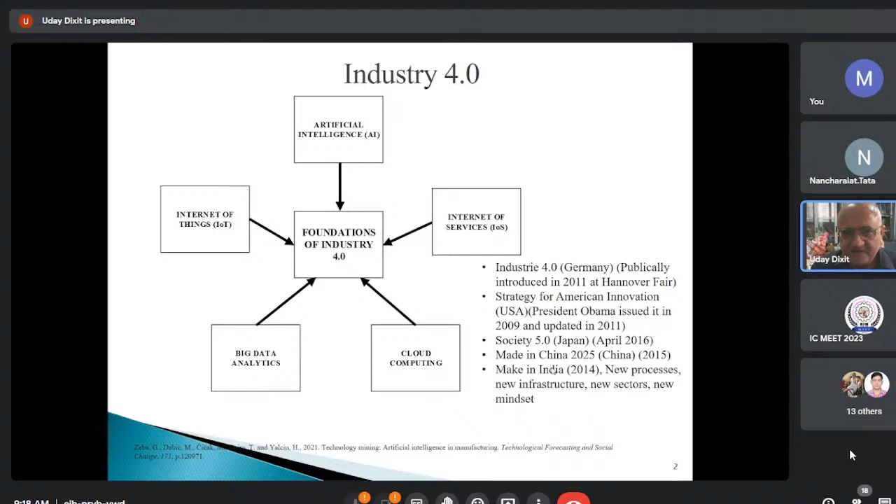So this is what, he also now took initiative about Digital India, for which digital manufacturing also is naturally a part. Digital manufacturing is a process that uses computer systems to create, simulate, and optimize manufacturing processes. We can simulate the processes.

Then 3D printing is also part of digital manufacturing, because we are basically printing everything by computer. Just like we take a printout, we are now taking the printout of the actual object. Then computer aided design, of course, very important, simulation software.

By using digital models of products, manufacturers can test designs and simulate production processes to identify and address potential issues before physical production begins.

Digital manufacturing also enables customization and personalization of products, as digital designs can be easily modified to meet specific customer requirements. So we can have now mass customization. We can make the specific product for each and everybody.

I was just thinking, suppose you go to a cloth shop and you want to purchase some t-shirt. Generally the shop has about maybe 10-15 varieties of t-shirts, maybe 20 varieties, but the population is huge, so the t-shirts will become common.

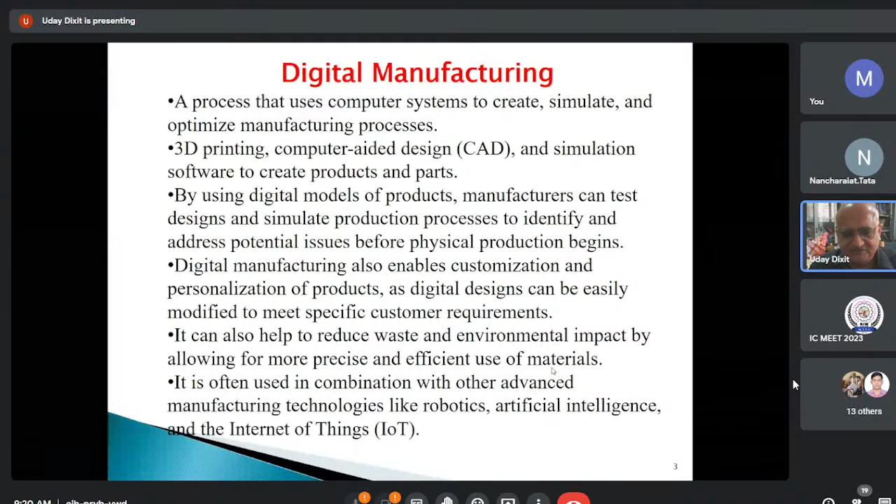Digital manufacturing can also help reduce waste and environmental impact by allowing for more precise and efficient use of materials. It is often used in combination with other advanced manufacturing technologies like robotics, artificial intelligence, and the Internet of Things. Nowadays, we are also talking about digital twin.

This is a new type of topic, although basically research in that direction has been going on for decades. But now in a big way, digital twin research is coming up. It has become a buzzword. Digital twin is a virtual replica of a physical model or process.

It is mainly used for controlling, monitoring, and evaluating the performance of the physical model or process under consideration, and real-time monitoring of manufacturing processes using digital twin enables manufacturers to improve efficiency and throughput. The ease of availability of data captured from sensors has made it much easier to create digital twins.

Now, if you want to make a real digital twin, naturally you have to do modeling and simulation of the process beforehand. Then only you can make a digital twin.

This was mostly first used by NASA. This is the actual rocket which is going in space, and in the virtual space the same thing is happening, so it is like a digital twin. Whatever is happening in space, the same thing you are seeing on your computer screen.

If anything is going wrong there, you are trying to correct from here itself, and you are controlling, because obviously you cannot go into space, you are controlling from the ground. So it was highly needed for NASA to work on the digital twin.

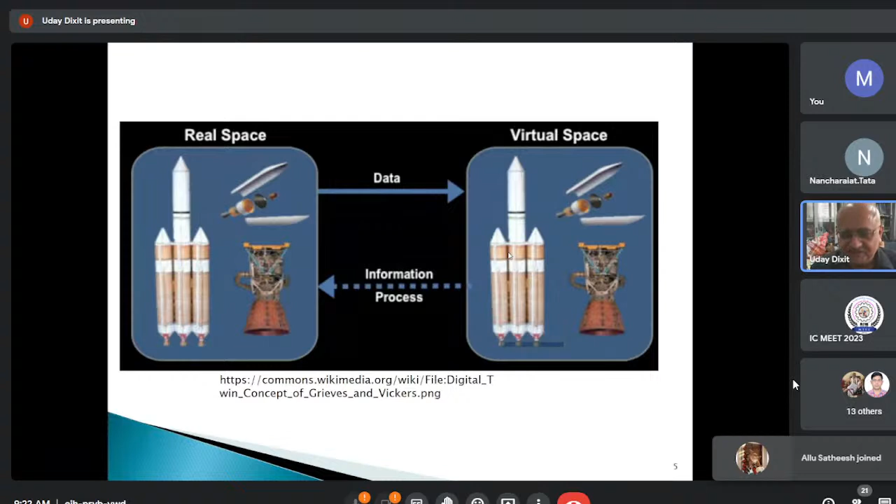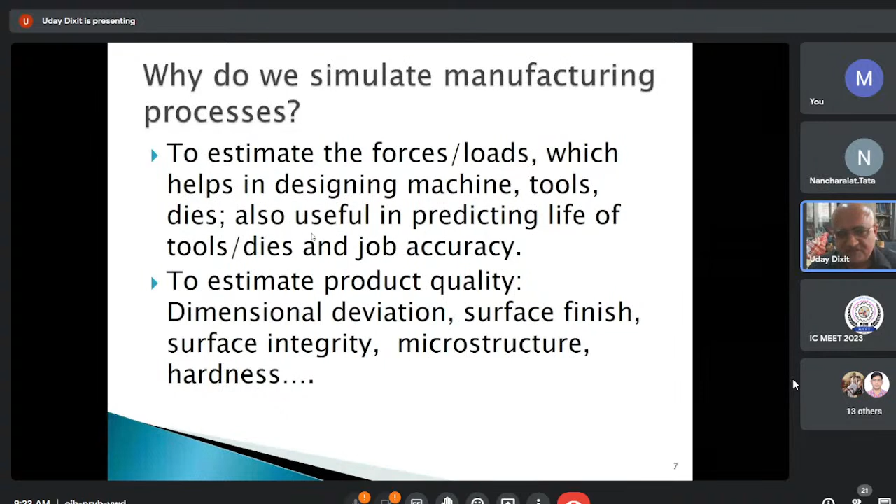To be specific, manufacturing processes are simulated for estimating the forces and loads, which helps in designing machine tools and dies, and also in predicting the life of tools, dies, and job accuracy. We also want to estimate product quality, dimensional deviation, surface finish, surface integrity, microstructure, and hardness. Some of these techniques are now well established, but some are still difficult even now.

Let me explain the difference between modeling and simulation, since we often use these words interchangeably, even though the topic of this talk is modeling and simulation of manufacturing processes. Basically, a model is the representation of a process that provides some information about it. It may not be the actual process, but something representing it, giving partial or full information. It can be a physical model or a computational model. A model gives information about the process, and execution of a model is called simulation in computer terms.

Suppose I make a model, meaning I put in a lot of equations and mathematics, write the computer program, and finally execute it by giving different input values. I will show you results, and those will be called simulation.

Two types of models are used: the direct model and the inverse model. Both are important. A direct model means you give me input parameters and I tell you the output. In the inverse model, you give me the output that you are getting, and it tells you what the input must have been.

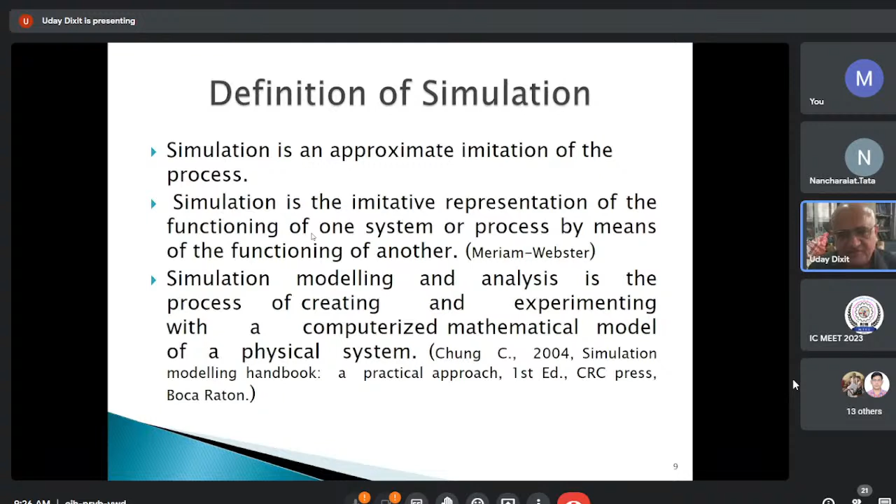Simulation, modeling, and analysis is the process of creating and experimenting with a computerized mathematical model of a physical system. That is what we call simulation and modeling.

Now let us be specific about manufacturing processes, particularly in the context of mechanical engineering. One is machining, a subtractive manufacturing process where we remove material to make a shape. Then metal forming, which can be called mass-conserving, where we just change the shape of the metal. If I have a rod, I can bend it and that becomes a mass-conserving process. Casting is also mass-conserving. Metal forming and casting are similar in that you take the same amount of material without wasting much and make the shape.

The only difference is that in casting there occurs a phase change from liquid to solid, while in metal forming the solid remains solid, though it flows like a liquid. In casting you make it in liquid form and then it solidifies. Then there's powder metallurgy, where material in the form of powder is used to produce shapes; it is similar to casting, except here the powder has to be compacted and sintered to get the final process.

Then joining, meaning welding and adhesive bonding, where you join two materials. And 3D printing, now called the additive process, which is something like the opposite of machining—instead of subtraction, you are doing addition.

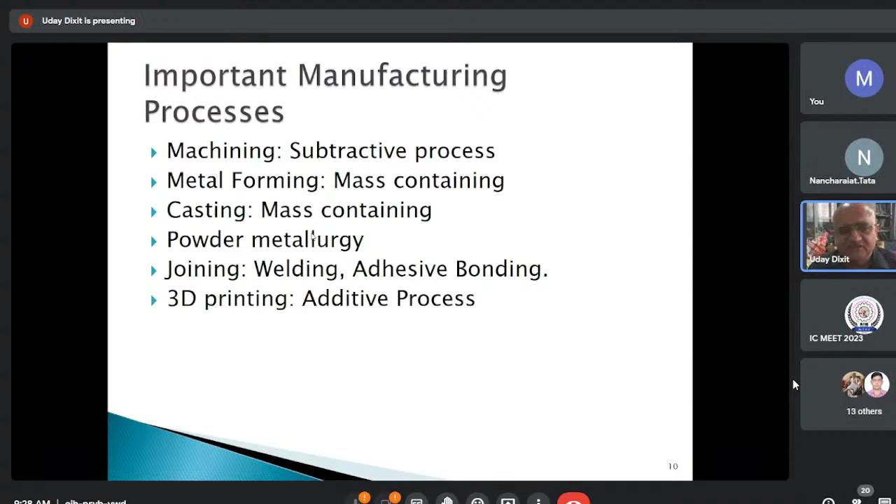It gives very good surface finish, but has a drawback also, it's not very sustainable. Its electrolyte is not good for the environment. I heard that in some countries it is banned, but in our country, of course, we are using it. So we have to be careful about the wide use of that, and particularly we need to develop a sustainable electrolyte rather than one which will harm the environment.

And then typically this is machining. Now coming to the metal forming processes, these are the processes that cause changes in the shape of solid metal parts via plastic deformation. We have bulk metal forming and sheet metal forming, two types of things.

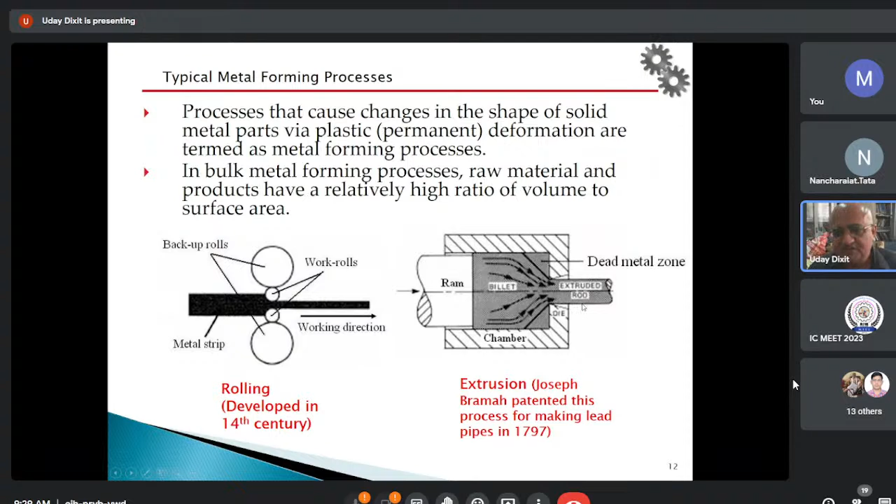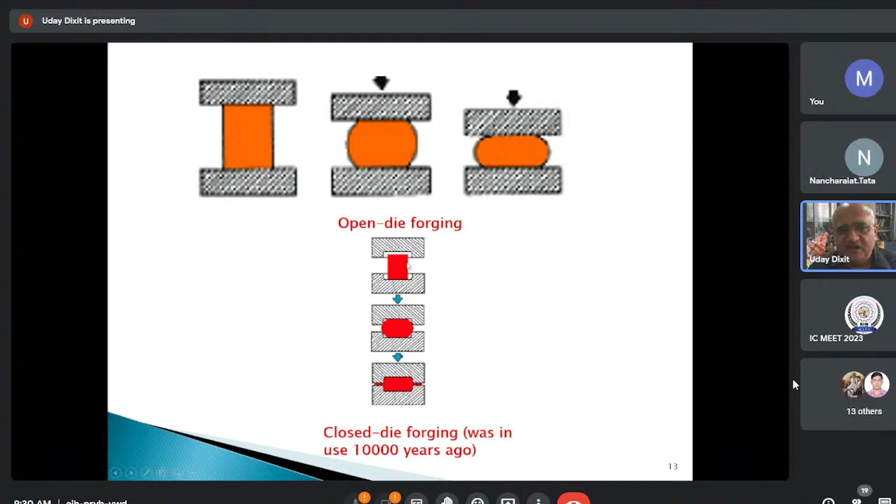An example is the rolling process, and here you have extrusion also, which is a bulk metal forming - you are pushing it. You can have forging, this is open die forging, and this is closed die forging. You know that the connecting rod of an automobile is made by a closed die forging process. And then wire drawing, you can make very thin wires.

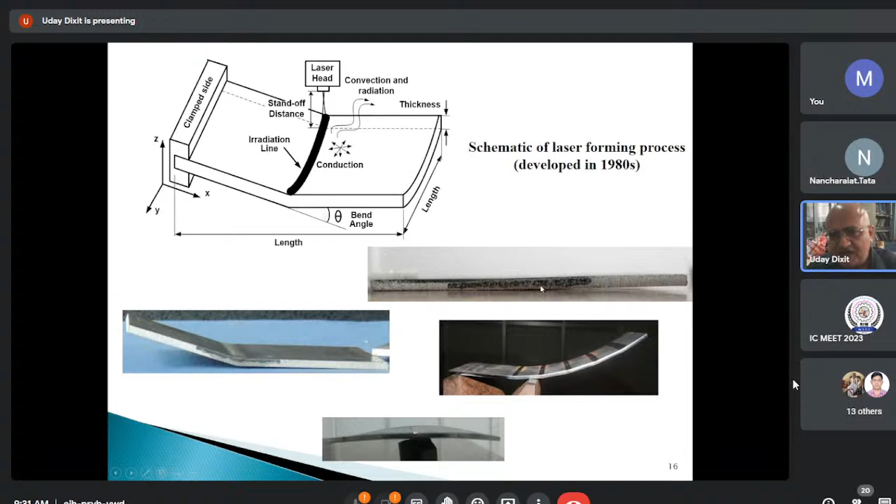Not only machining - in machining, laser was employed since many decades - but nowadays people are even deforming the material by heating, by thermal effect only. So we see here in our lab we have deformed the material. This is a very thick one also, but it has been deformed in a better way than mechanical deformation. We have made this circular arch type of thing, cup type of things, and even very difficult material which are not so ductile can also be deformed because they have been heated.

This is laser - that was only laser bending, but this is laser assisted bending. That means I am putting mechanical load also, but making use of the laser to soften the material. We make it soft, and that's why it bends very easily. So heating is done to change the material property, and load is applied in a mechanical way.

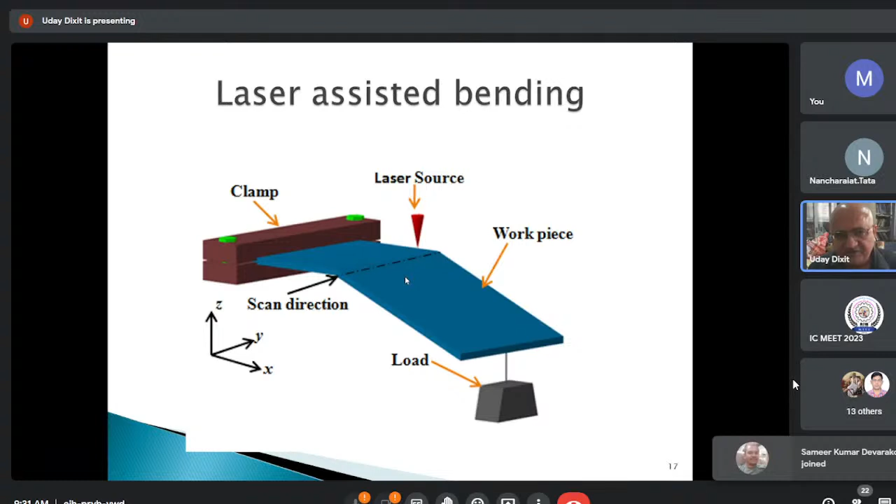And then there is a Japanese term, origami. Origami means making toys using paper - we make many things by paper. Similarly, a sheet can also be deformed by laser heating, and that type of thing is also done. There are now industries which are using laser origami.

Now these were the metal forming processes to make a new product, but metal forming processes can also be used for improving the properties of the material. Among them we have severe plastic deformation processes like equal channel angular extrusion, where you extrude it and it makes a 90-degree bend, then you go back, and you do that again and again. The shape doesn't change, but the microstructure improves and you get high strength.

Similarly, you see this small disc, and your material - one die is rotating and also applying pressure. So combined pressure and torsion also puts a lot of strain hardening, and you get better quality material. Similarly, you can have accumulative roll bonding, where we roll the material, its length becomes bigger, then you cut it into pieces, stack it together, and repeat that process. The purpose here was to get good properties of the material.

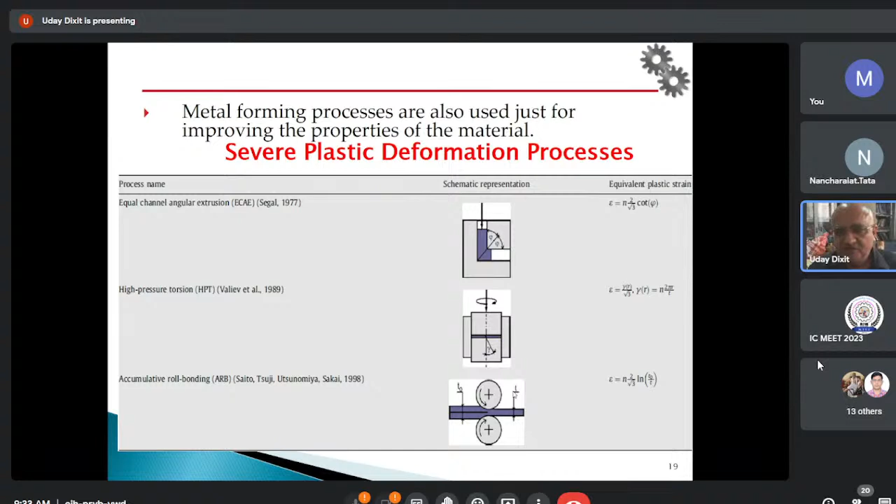The green zone is elastic only, and if you remove the load, the plastic zone will not come back, but the elastic zone tries to come back. So in a way it puts pressure on the plastic zone, generating residual stresses. These compressive residual stresses help us a lot because they nullify the effect of stresses due to loading.

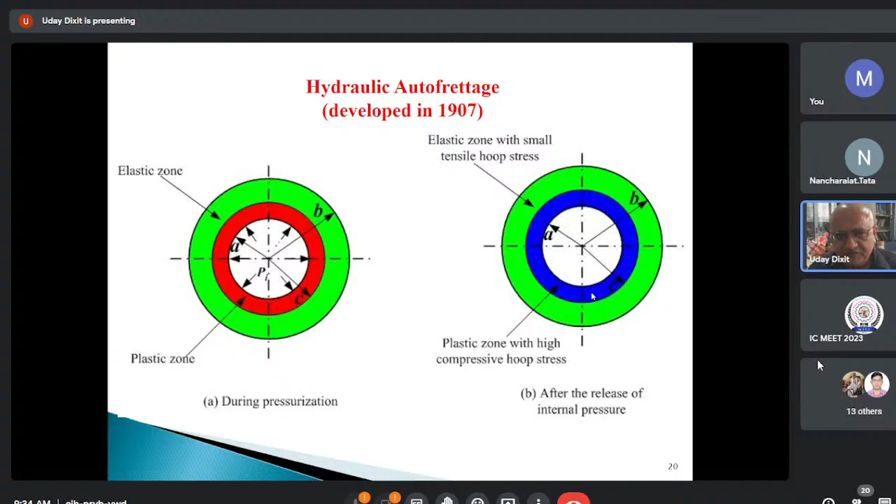So here at IIT Guwahati, we developed the thermal autofrettage process, and this is the same type of thing which is done by hydraulic pressure in the previous slide, but done by thermal means. We just create a differential temperature and it creates ultimately the residual stresses.

Similarly, we have the rotational autofrettage process. This means that if it is rotating at high speed, you get centrifugal stresses, and these can even cause plastic deformation. Once you remove the load, there are compressive residual stresses.

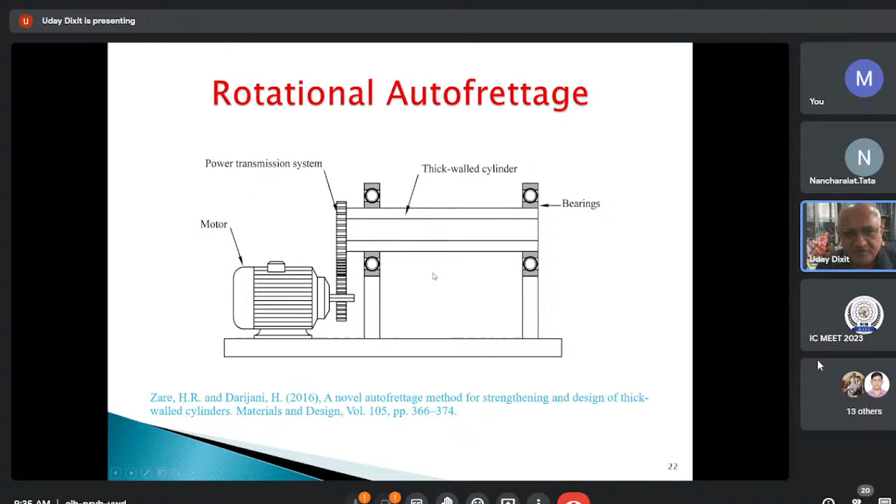In fact, this process has been conceptually developed, but so far not even a single experimental paper has been published on this process. In 2016, the first paper was by Zare and Darijani. So there is a lot of scope to do experiments on rotational autofrettage also.

So, having given this brief exposure about various processes, let me now tell you what are the objectives of modeling and simulation of manufacturing processes.

These are the objectives. One is the power requirement - we want to know how much power the process will take, pressure in the die and tools, stresses, strains and strain rate distributions in the material during processing, and residual stresses in the product.

Residual stresses are very important. They remain in the material, like silent stresses. You will have compressive and tensile stresses simultaneously. On the surface, compressive stresses are better, but tensile stresses are bad. Not many people pay attention to residual stresses because modeling is difficult, and experimental determination is also difficult.

You need some techniques, but this is worth paying attention to because residual stresses occur in machining as well as other processes, and even in 3D printing. They have a major impact on the life of the product.

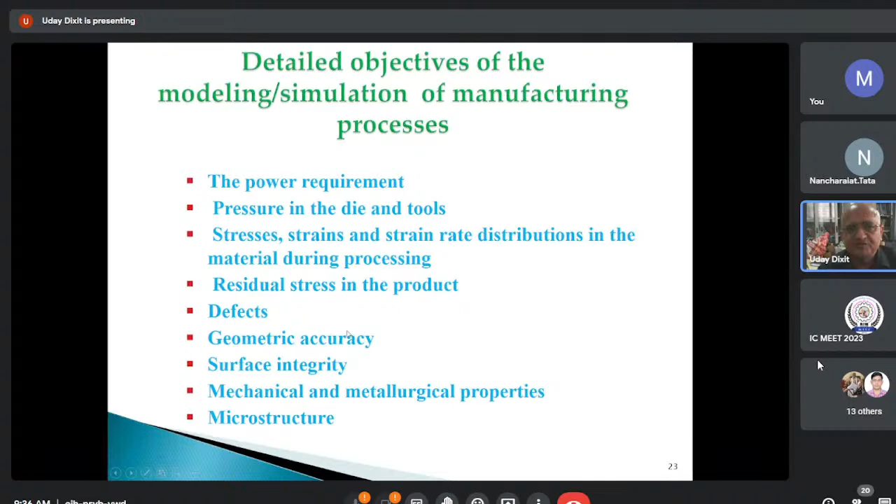Then there are many types of defects - geometrical accuracy, surface integrity, mechanical and metallurgical properties, and microstructures - that can be predicted by proper modeling and simulation.

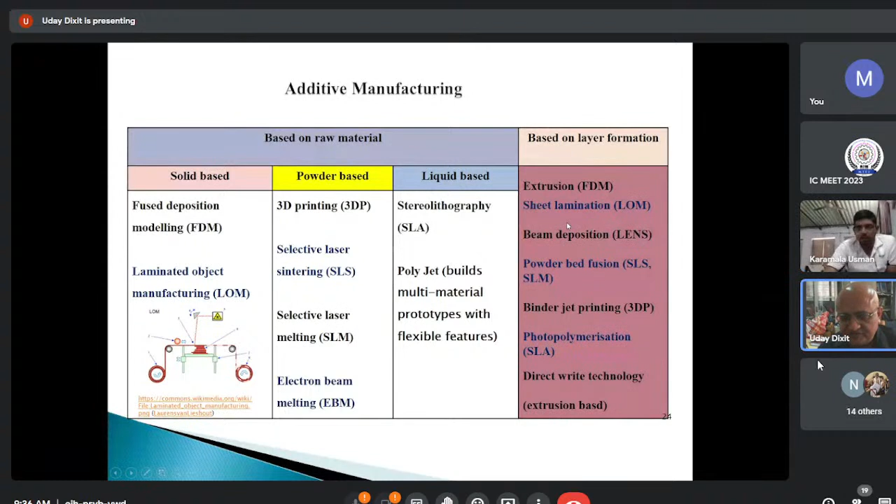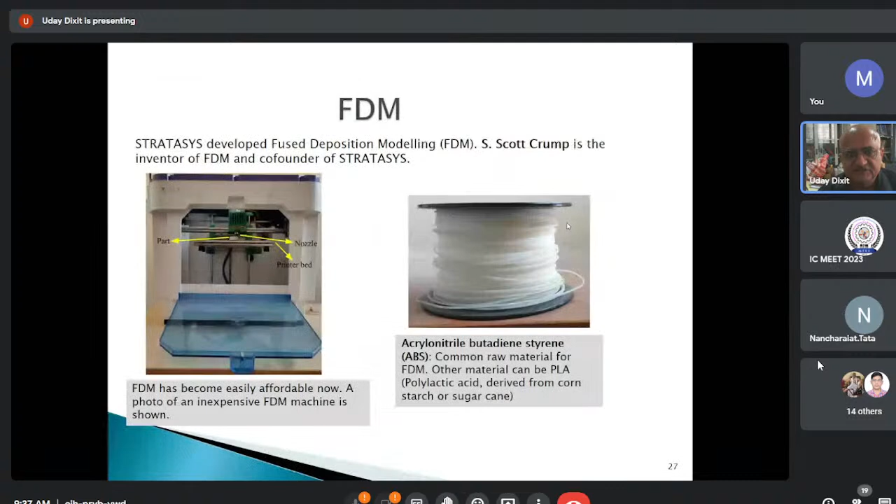Before that, in additive manufacturing we have various processes - solid-based, powder-based, liquid-based - but I think you are familiar with that. Every process has some special features; I'm just passing through this. We have FDM, inkjet 3D printer, selective laser sintering where you sinter the powder material. All these processes have become very important, but modeling in this area is still needed, and modeling efforts, though present, are limited.

Let me briefly tell you that nowadays when we do modeling, we use new techniques - either finite element based, or soft computing based. But I want to give a brief summary of modeling efforts; some of these techniques are still useful and should not be thrown away. Although their importance has diminished, they will be very helpful before you make the actual model in a computer. These analytical methods are also important.

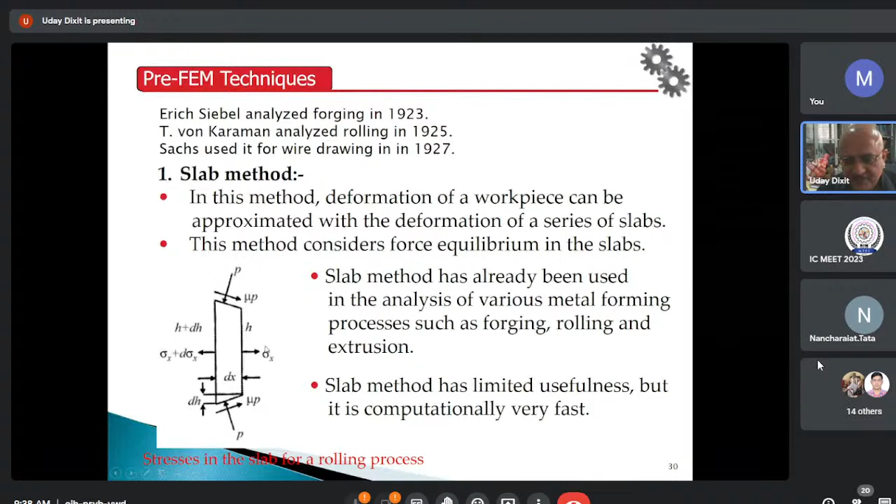One such method is the SLAB method, which is taught in undergraduate classes too, where you make a slab and then form a differential equation of the process. By this you can find out the forces in rolling, wire drawing, or any type of process.

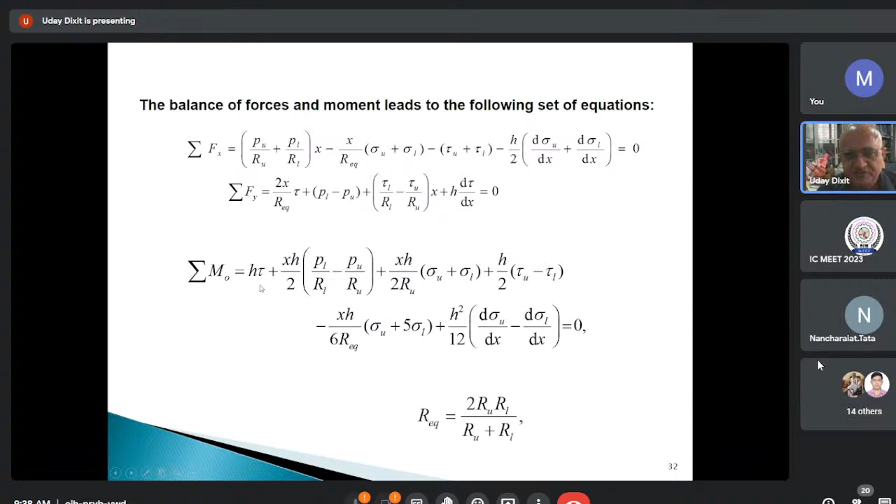In 2000, we published a paper about producing curvature in a sheet using the slab method, actually asymmetric rolling. Suppose the speeds are different, then it takes curvature, and you have to write many equations based on taking a slab, force balance in x and y directions, and moment. These then have to be solved by numerical methods - a computer will still be needed because you cannot solve that by hand.

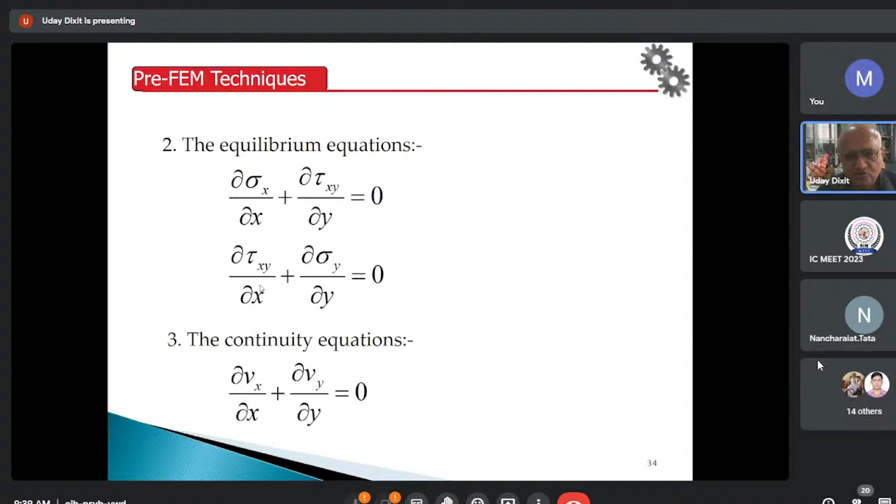Then there is the slip line method, which is also based on equations, but it is only for plane strain type problems.

So, limited importance. Here we assume that the material flows along the slip lines, along some 45-degree lines to principal stress, and based on that concept we have mathematical equations.

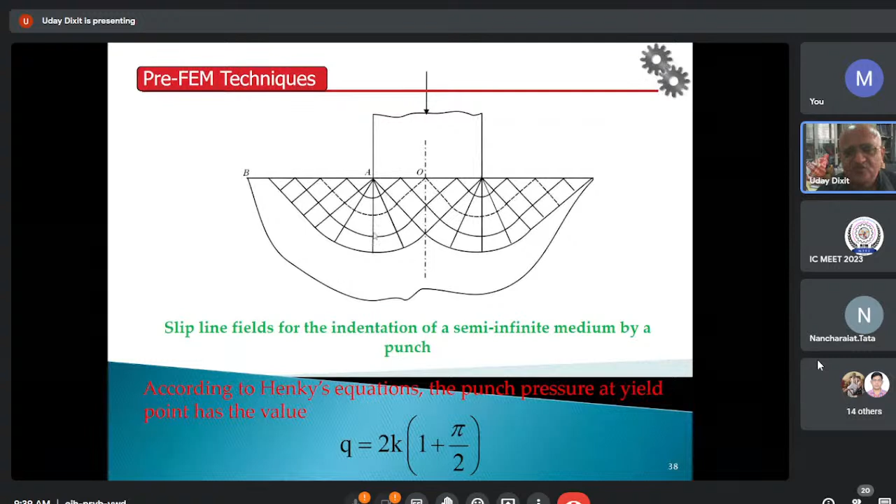Then you can find out indentation of a semi-infinite medium by a punch. You can find out by slip line method how much load will be there. Even in machining, you can use slip line method.

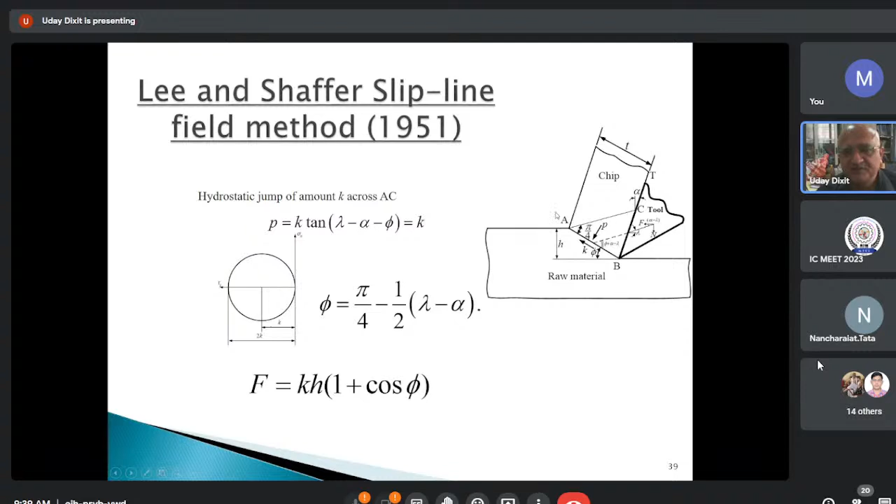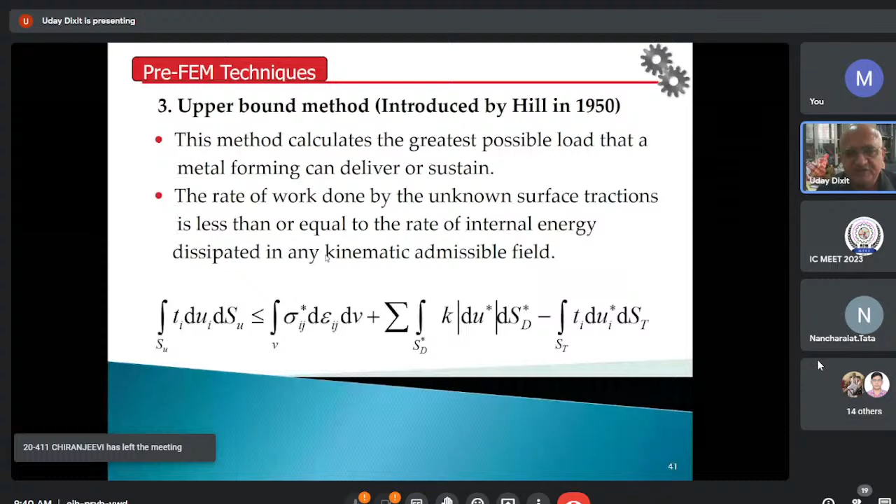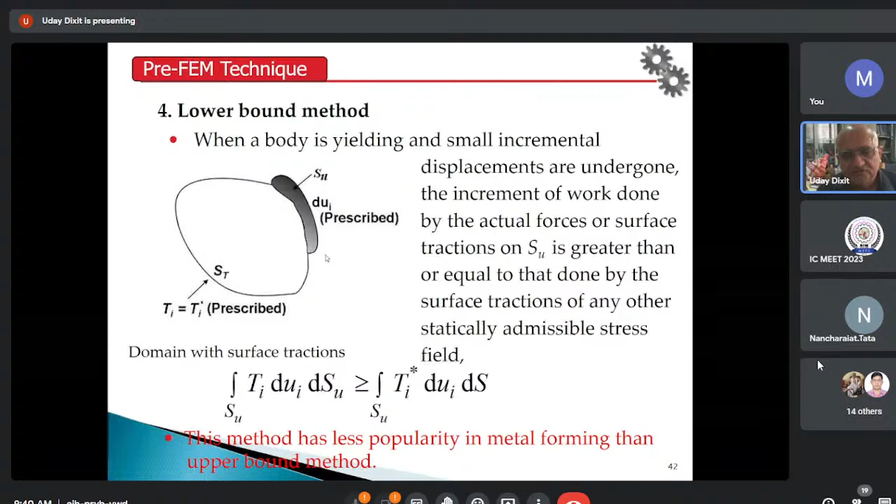Then upper bound method, it was introduced by Hill in 1950, and it can give you an estimate that it is an upper bound. That means power can be this much, maximum power can be this much. And lower bound method is just the counterpart which tells about the lower bound.

And visioplasticity method, of course this is almost nil nowadays, but it was a semi-analytical method. First you make a grid pattern in your material, then deform it in process, and then you analyze how much deformed grid looks, and based on that you do analysis.

But nowadays you know that basically FEM has come starting from 1970s. So here you have to solve the equation. If you want to tell what is FEM in half a sentence, then you say that FEM is a method of solving differential equations. Finite element method is a method of solving differential equations.

That means you should have a differential equation, then only you can apply FEM. Otherwise you cannot do it, so that one has to understand. So what differential equation do we use? We use continuity equation, we use equilibrium equations of the material, that means basically Newton's law.

Understanding this thing has become more important because nowadays you have ready-made packages which will solve your problem, but you do not know which differential equation is ultimately getting solved. Many students are not able to answer that question. So therefore you have to pay attention that actually I am solving this differential equation.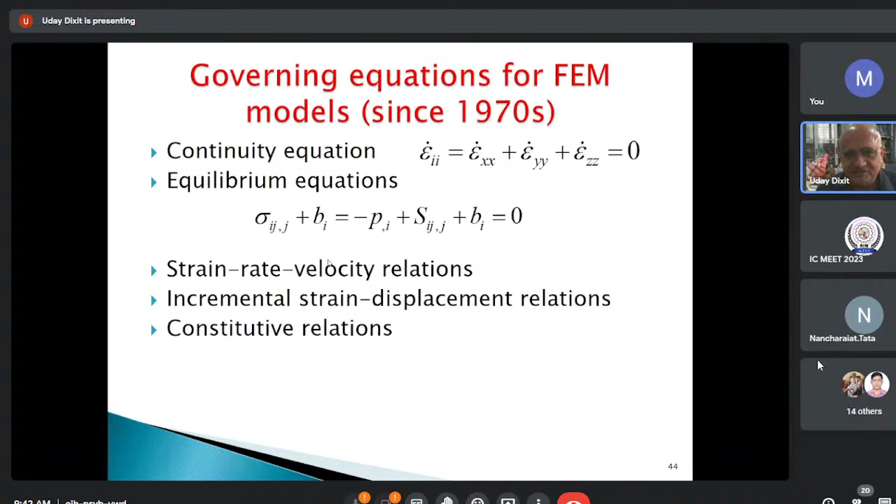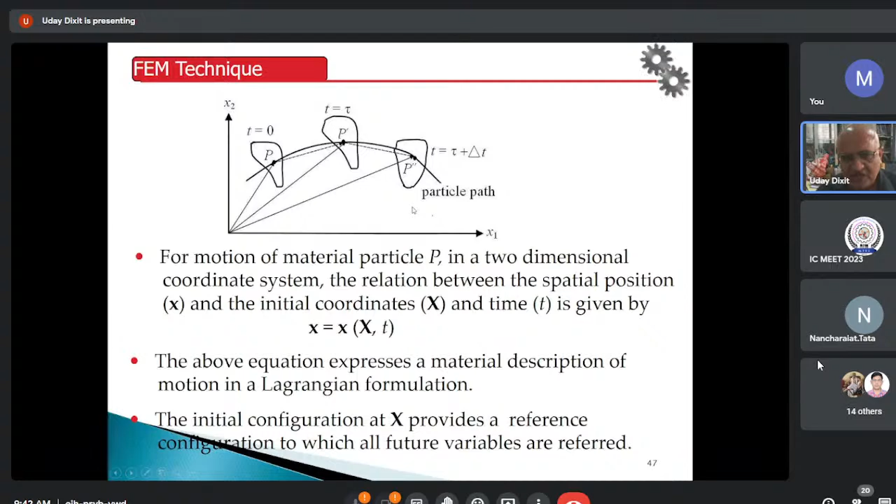Luckily I don't have to write the code because the code has already been written in the package. And there are some techniques: one is Lagrangian formulation, which is a control mass approach, and then Eulerian formulation. That means in one we follow the particle, so particle path is followed, and in the other we stand at one place and see how many things are going.

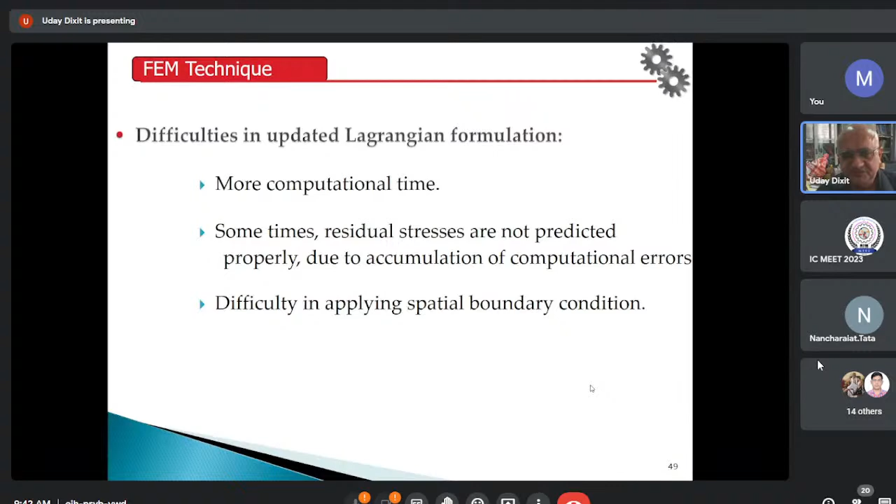Like I am standing here, I am seeing one car has passed, one truck has passed, and after that something else will pass. So these are the things. Our Lagrangian processes will have difficulty because of more computational time, and in fact residual stresses are not predicted properly, and some boundary condition application may also be tough.

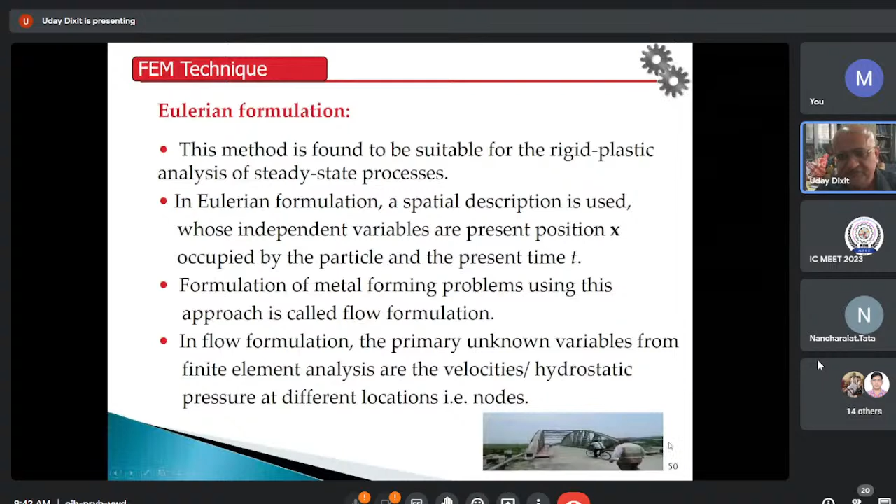In Eulerian, of course, as I said, you stand at one place, say on the bridge, and see how many things are passing. So you make a control volume and similar things. But there will be equations in this also, like the Levy-Mises plastic flow rule. You have to understand the equations, and then strain hardening behavior, continuity equations.

So there are many techniques of doing that. Luckily now the packages are there, like penalty method, mixed pressure velocity formulation. And how do we solve the simultaneous equations? It is not that you can solve only by Gauss elimination, you have to use other methods, like one such method is the Householder method, which can solve these type of things.

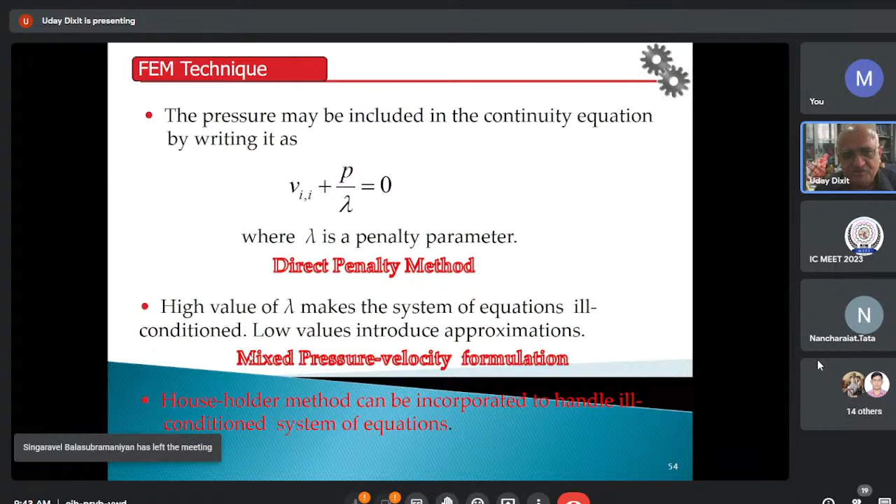So in the coming days, because the packages have become very efficient, you will not get much opportunity to develop codes for that, since commercially they have already been added. But it is a request to all the young engineers that they should try time to time, they should read these papers in which detailed description is there, so that they can know what is going on inside the package.

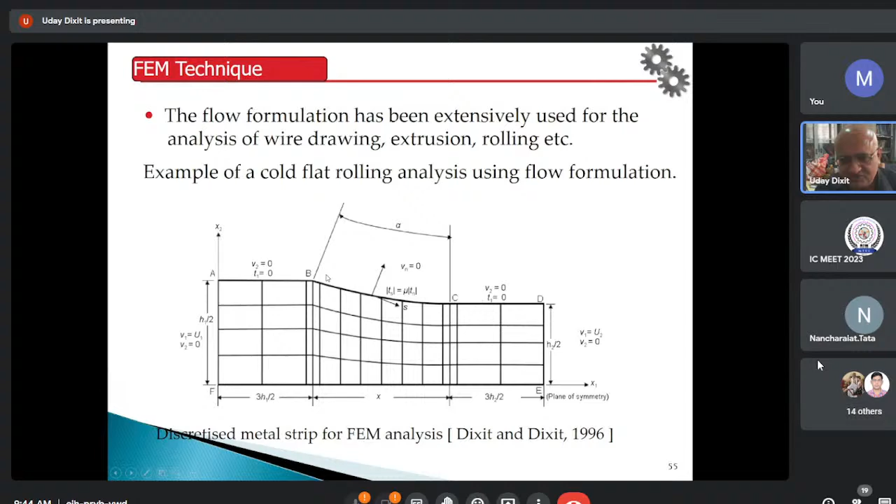So this is from my PhD, long back, when I made a FEM model. This shows the boundary condition, I wrote the package, and after that there were some difficulties, like some spurious pressure term was coming. Later on, after 10 or 12 years, my student published a paper and modified my own analysis. He combined finite element and finite difference together, and also used neural network, with computations, not experimental data, but computations only.

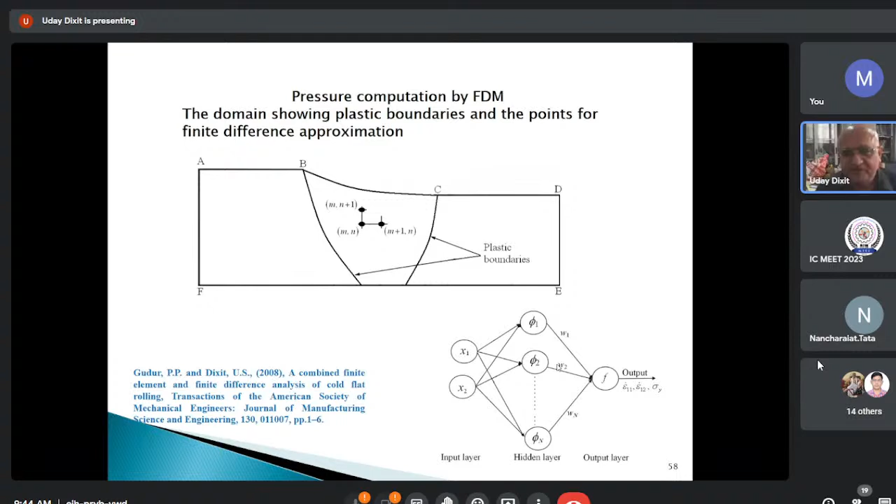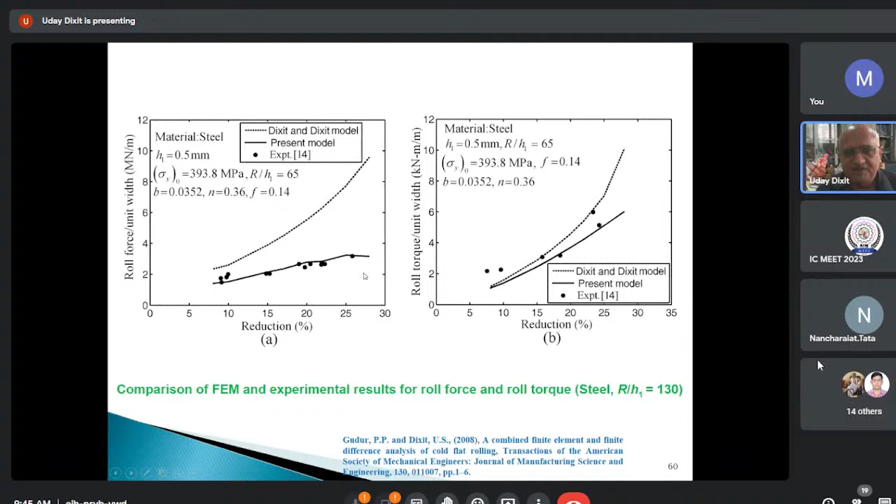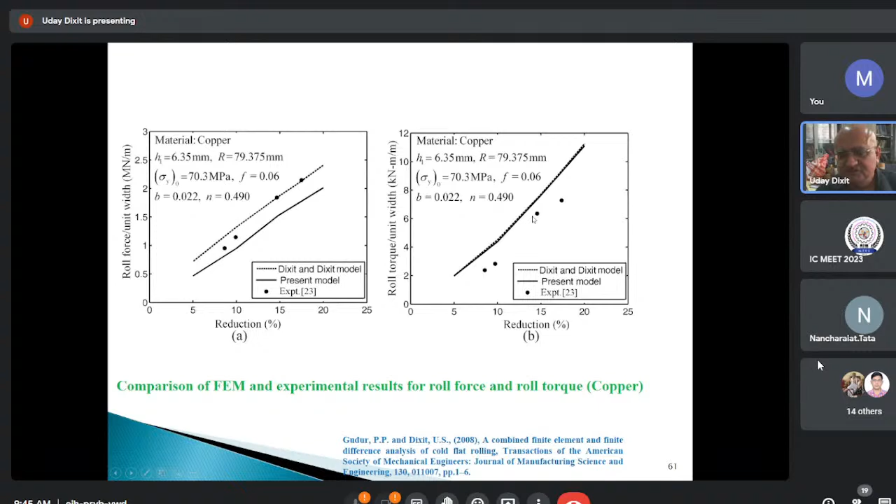Similarly, for other materials also, you see my model was giving huge error, but after modification, my student's model gave very good results. Similarly, for other material also, both the models, and this is experimental, both models are giving this result.

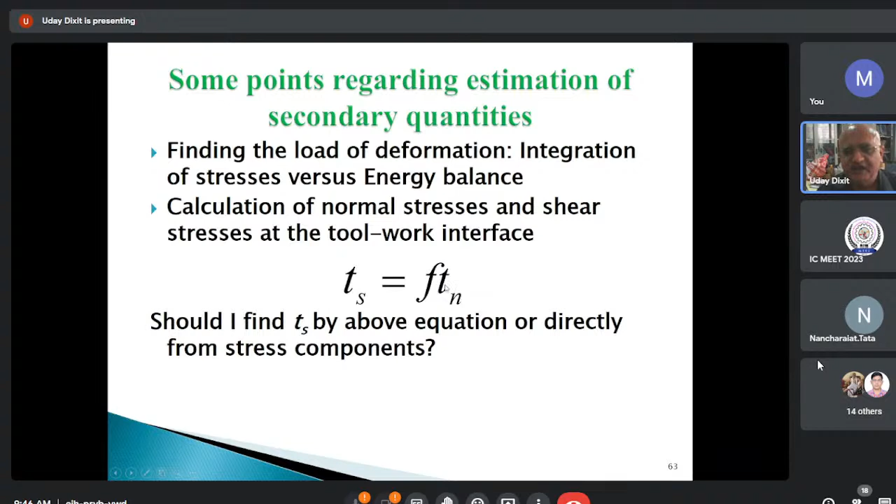Now there are some points that when you do any numerical things, small things matter a lot in numerical accuracy. For example, there is a formula Ts equals F times Tn, where F is the friction coefficient and Tn is the normal stress. Now the question is, in FEM, should you find Ts by equation, or directly from stress components?

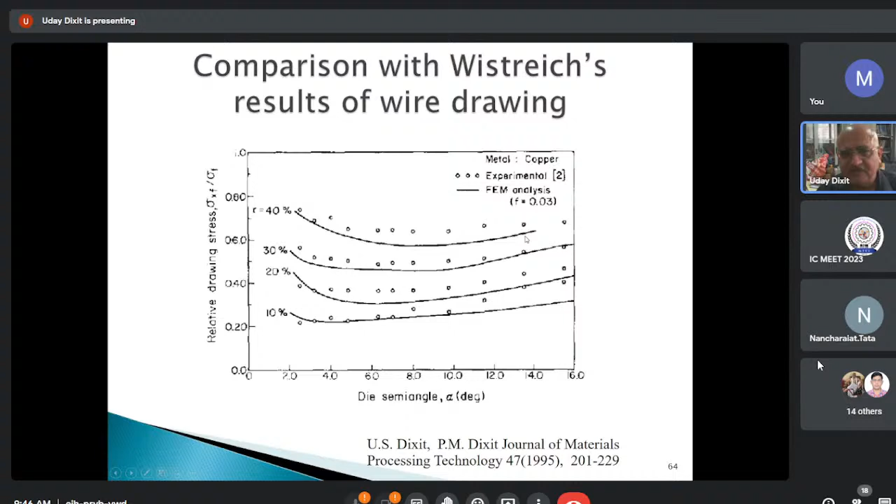Sometimes if you use this formula, you may get better results. This is my result for wire drawing, which I did long back, and you see the results are matching with the experimental results. Numerical aspects are in fact very important, because sometimes if you make a numerical mistake, the results can be very funny.

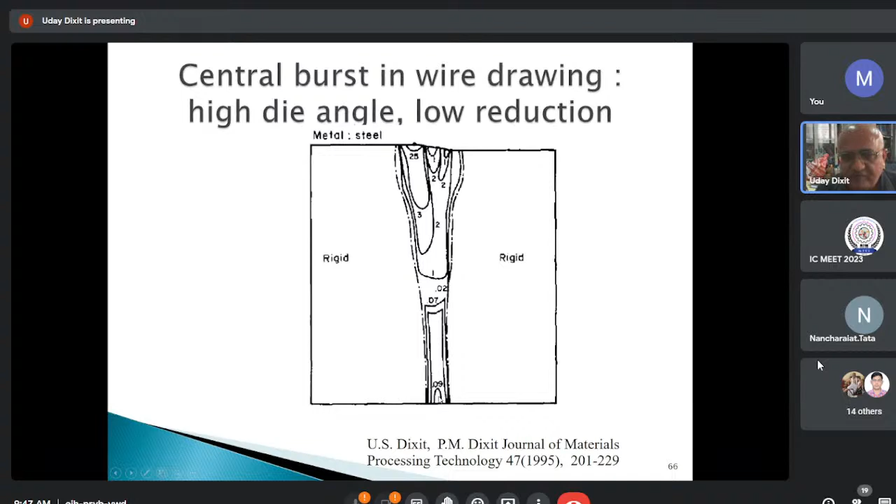If you do proper simulation, you can find out even the characteristics of the material very nicely, and some defects also. For example, in a particular situation, the plastic zone has become very narrow, so chances of bursting or cracking is there. That type of thing also you can know.

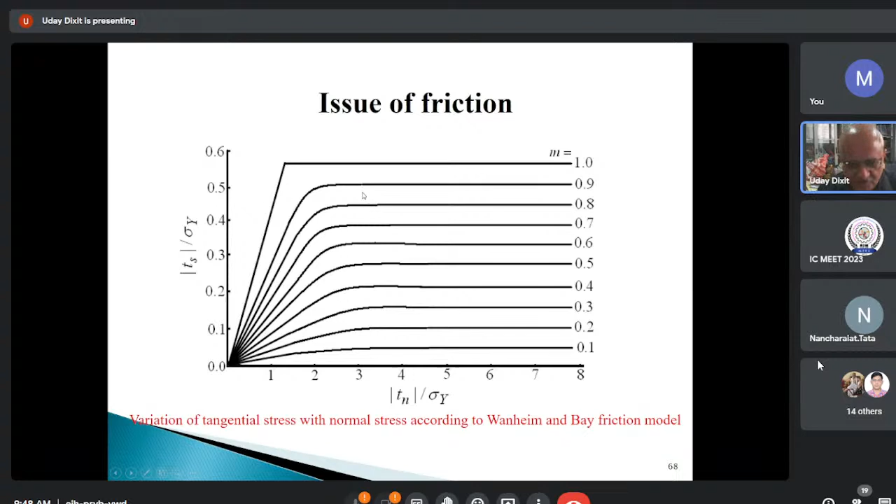Similarly, we know similar behavior in rolling. In all these processes, friction modeling is also very important. We have usually been told about Coulomb's friction model, but Coulomb's model doesn't work well. It works at low normal stress, but after that it becomes more or less saturated, meaning friction force doesn't increase with load. This is the Wanheim and Bay model, which shows how the transition takes place from Coulomb's model to this model.

These things are very important, and friction varies with temperature and amount of plastic deformation also. If somebody wants to do research in friction in manufacturing, lot of scope is there, but I must warn that the area is very challenging, very difficult to get a breakthrough. Lot of conflicting reports you find in the literature.

So coefficient of friction, we did this, and you see, because friction depends on so many things, it is very difficult to predict. There may be chemical aspects, lubrication, surface oxide film, tooling aspects, what type of tool, material aspects, thermal aspects, mechanical aspects - many things are there.

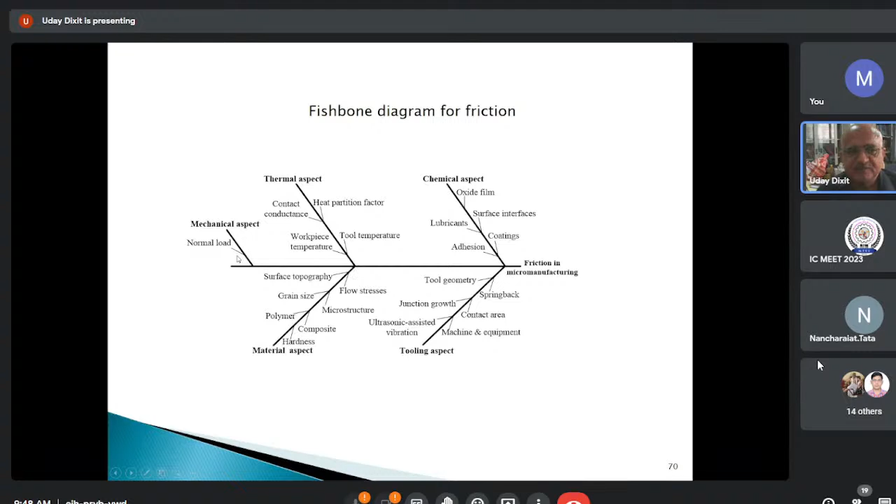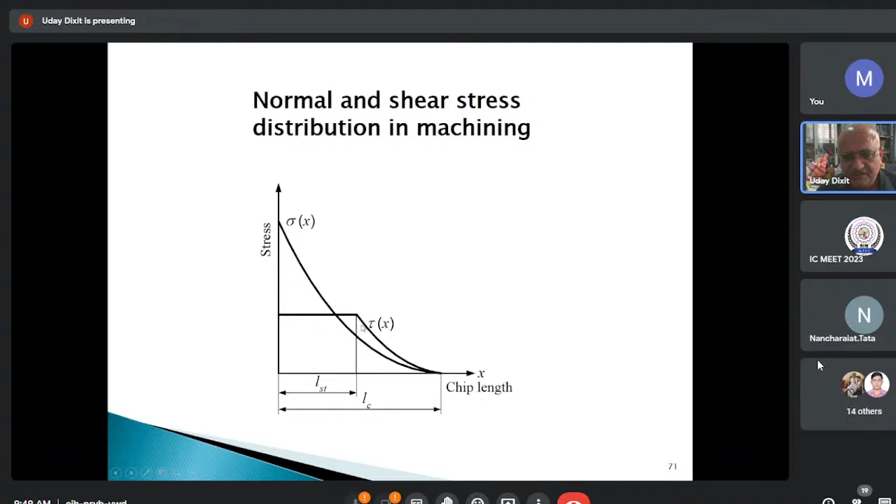In machining, the normal stress varies like this, and the friction stress varies like this. In the beginning there is sticking type of friction, and then there is sliding. Another phenomenon is anisotropy, which can also be modeled by FEM, and then thermal modeling. Heat transfer and thermodynamics can also be applied in manufacturing. In fact nowadays, if you want to model 3D printing or anything, you have to do thermal modeling also.

A manufacturing engineer's job is very difficult when doing modeling, because he cannot say heat transfer is not his subject. So here I am modeling the rolling process, and I'll show the way we are modeling that, involving both deformation and thermal models, along with a lot of material models.

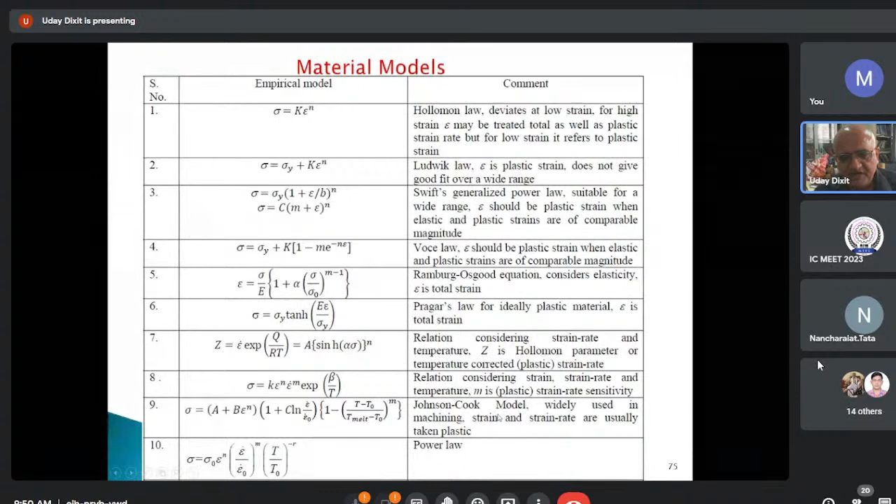We usually easily apply sigma equals K epsilon in Hollomon's law, but that's not the only thing. The stress may be dependent on strain rate and temperature. This is Johnson-Cook's model, and there are many other such models used nowadays.

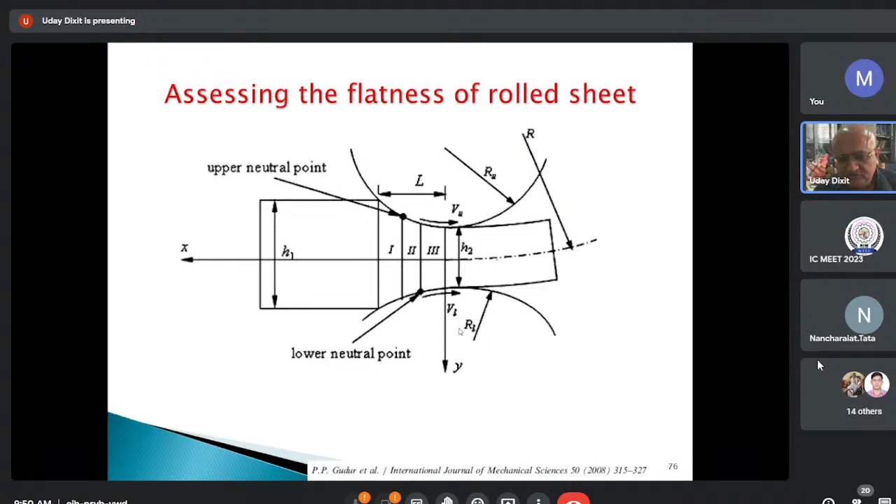Then you can assess the flatness of the sheet, etc. It is not only about the forces, but you can also find curvature modeling of foil rolling. This becomes even more difficult because a lot of elastic deformation takes place.

So how the foil will be modeled - we try to do inverse modeling at our IIT Guwahati. This rolling mill was developed by one MTech student, around 2000-2001, as you can see from the nameplate. It was an MTech project, and in that he made the complete rolling mill.

In fact, he wrote to one company to purchase two rolls. They said that such a small quantity they couldn't supply, but since he was doing it for his MTech project, they sent it free of cost - he only had to pay the postal charges. Finally it came and we fabricated it.

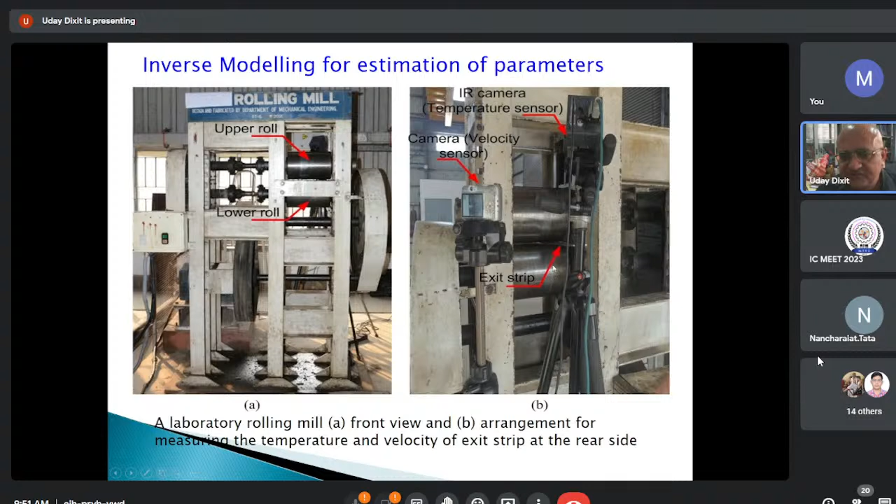So we keep doing small experiments here - putting a camera to assess velocity, and an IR camera for measuring temperature. By measuring slip and temperature, we predict what the property will be. So it's an inverse way.

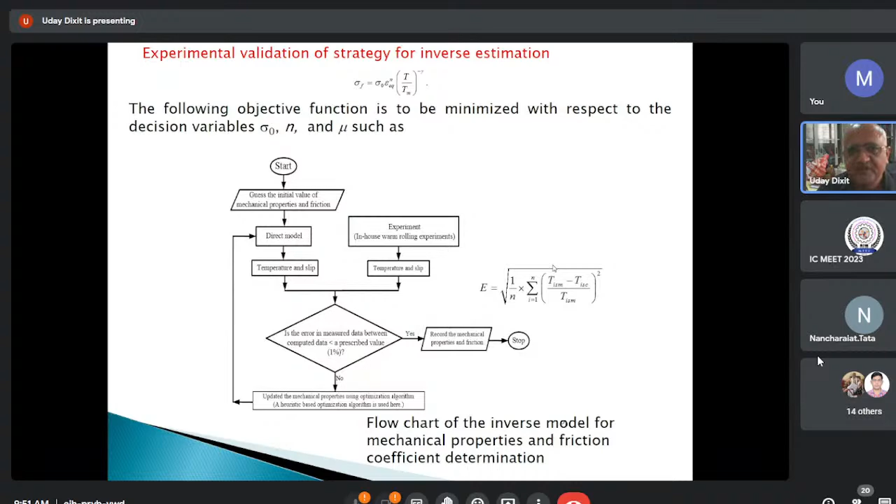So we do that, and through the inverse model we get the data, and then we put the actual data - both are matching together. And then we also attempted something else.

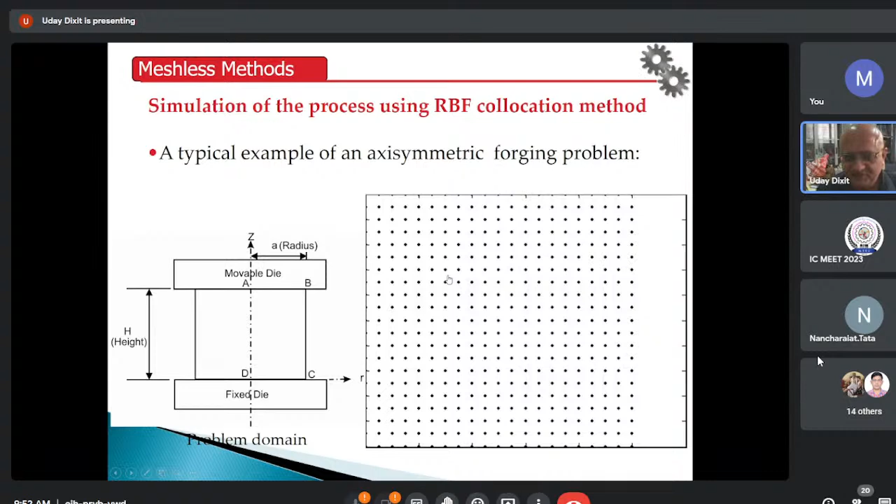There is a good book by Liu called Moving Beyond FEM, about the meshless method, where you don't make any mesh, there are only nodes. We applied it to one problem in axisymmetric forging, but frankly speaking, I couldn't get much better results than FEM, and there are a lot of challenges. So if you just want to do some work and publish a paper, maybe this is a potential area, but it's very difficult because it's still only at the research stage, though people are doing something.

So these were my results. Actually, this was published in 2007.

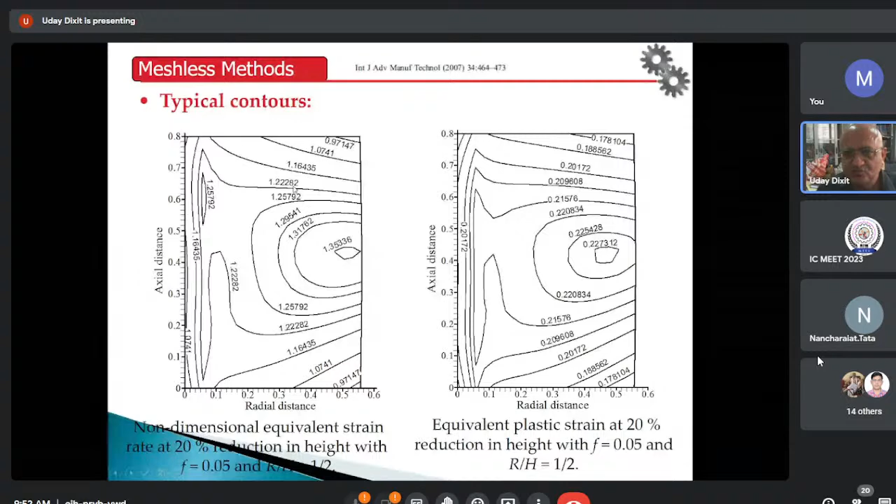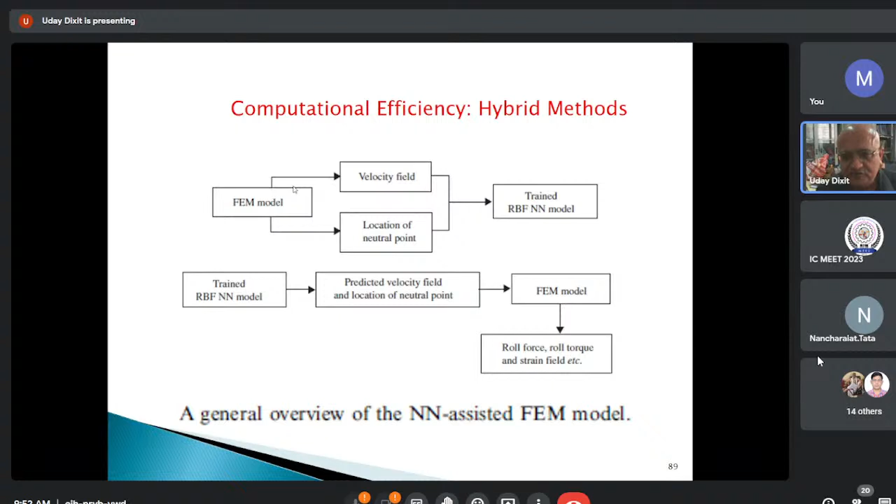Nowadays, to increase computational efficiency, you can use hybrid methods - that means you can combine neural network and FEM models. With FEM, you train a neural network, and then the trained neural network helps your FEM. So this type of AI-based methodology can help make the model.

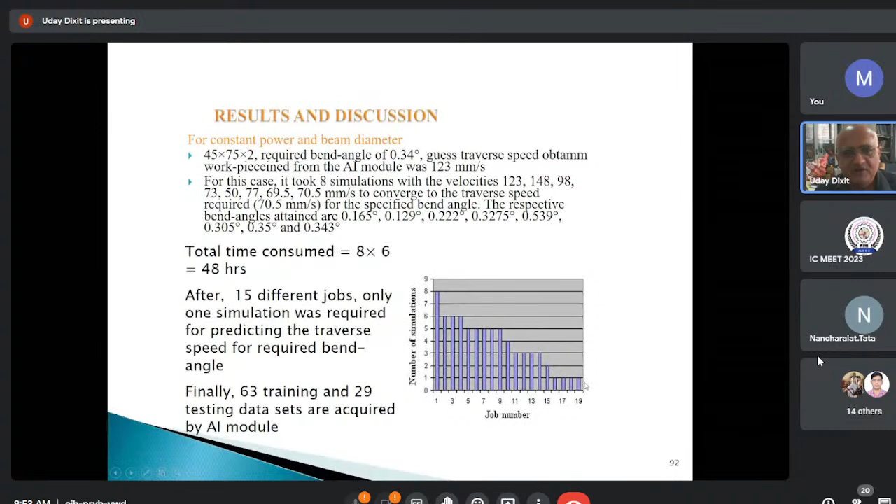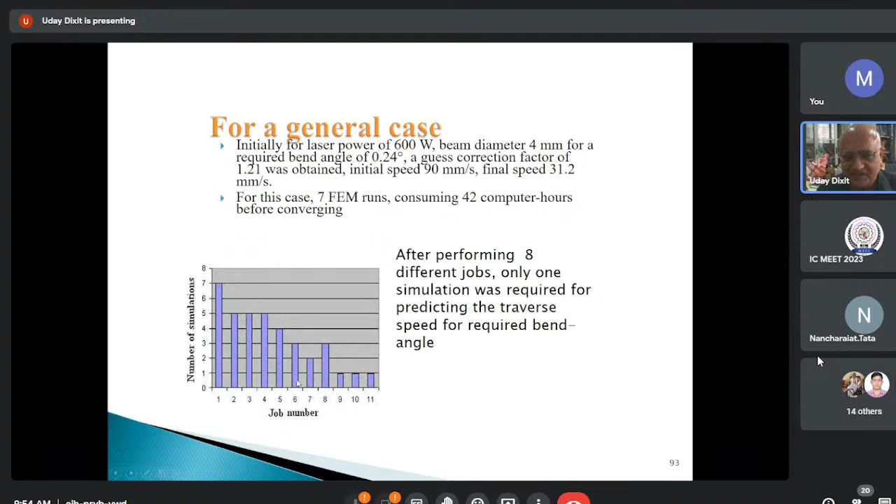Based on that, we have done many things. You see, the first time I made the job, it took 7 tries - like a worker given some job for the first time, he may have to make it 7 times before you're satisfied. But by that time the worker has become intelligent, and therefore takes less time next time. That is the computation in the simulation.

Then we are also doing phase transformation modeling, of how the phases change. Not much work has been done on this, because it requires the person to take interest in both metallurgy and mechanical engineering.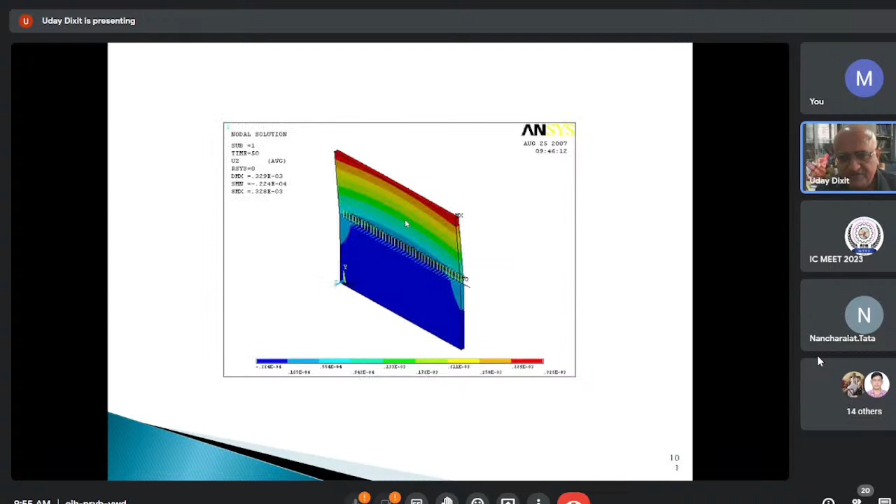You see austenite, pearlite, bainite, all those types of things, which were not taken into account in mechanical engineering modeling. Now you can do it with the help of computational tools, using many commercial packages. I did some bending of a sheet in ANSYS, and in simulation you can see details which may not be possible to see in the online system.

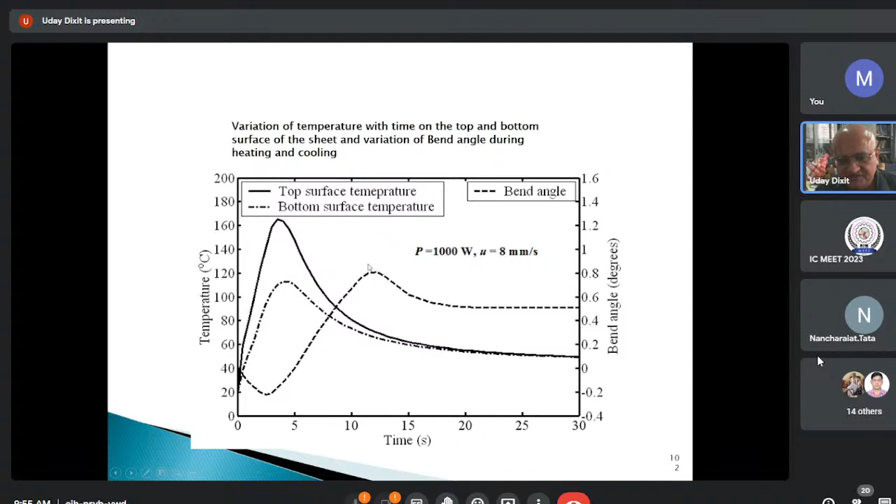So we are seeing how the temperature is changing, how the bending is taking place. First it comes in this direction, then changes direction after 1 or 2 seconds. Microstructure and properties, etc., can be modeled. You have to use equations like this for kinetics of diffusion-based transformation, like changing to martensite. Suppose austenite suddenly becomes martensite - this is not a diffusion-based process.

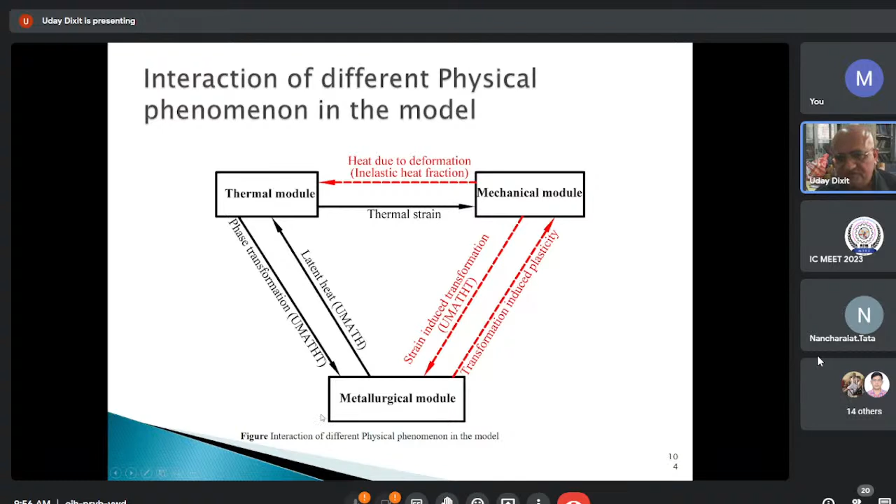So you can make a simulation code with a thermal module, a mechanical module, and a metallurgical module, and heat from deformation goes into the thermal module. The thermal thing then influences the mechanical module, and we modeled, for example, the laser bending process - heating the laser sheet and it gets bent. So I am predicting the hardness of this sheet by modeling the phase transformation etc. Because I know the hardness of a phase, I can predict the hardness of the whole strip, and these are the results.

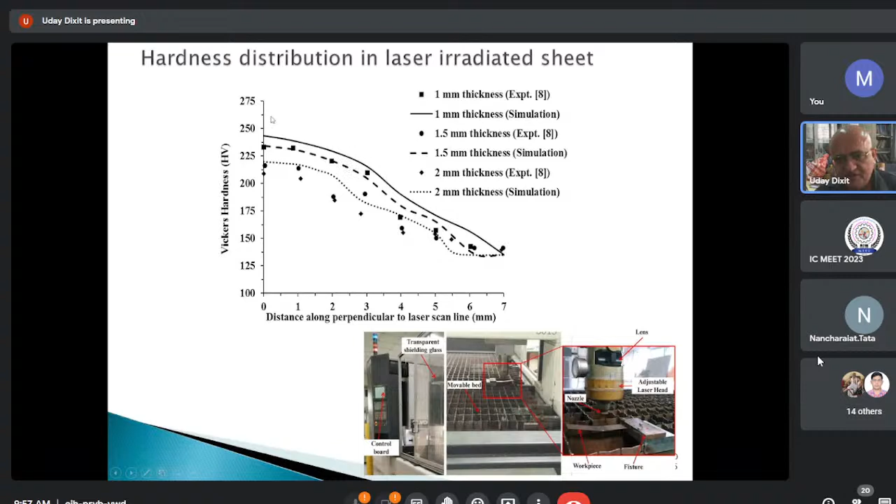They have been matched with experiments. Similarly, phase fractions change with time or distance. So these types of things are also there - bainite, ferrite, and what you get.

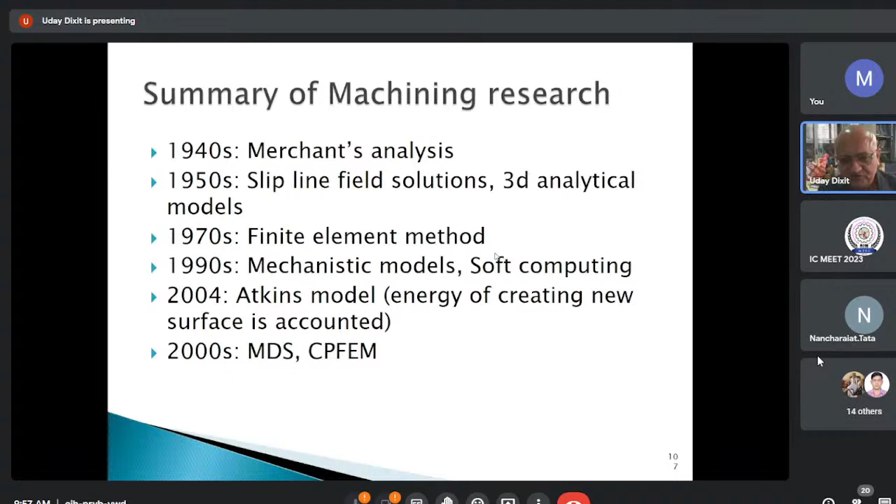Now let me give one summary: in machining, everybody does it, but it is still very difficult to model. In the 1940s, Merchant's analysis was done. In the 1950s, slip line field solutions and 3D analytical models. In the 1970s, finite element became popular. In the 1990s, mechanistic models and soft computing came. In 2004, the Atkins model found the energy of creating new surfaces. And in the 2000s era, you now have molecular dynamic simulation and CPFEM - crystal plasticity finite element method.

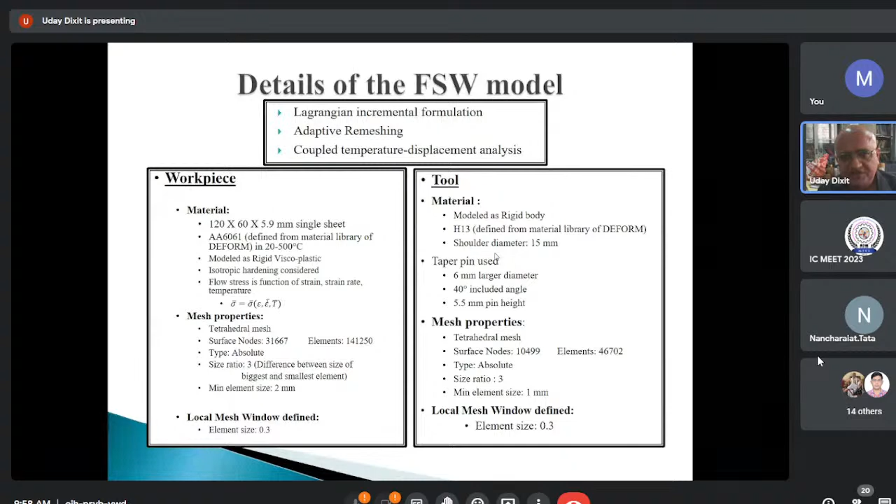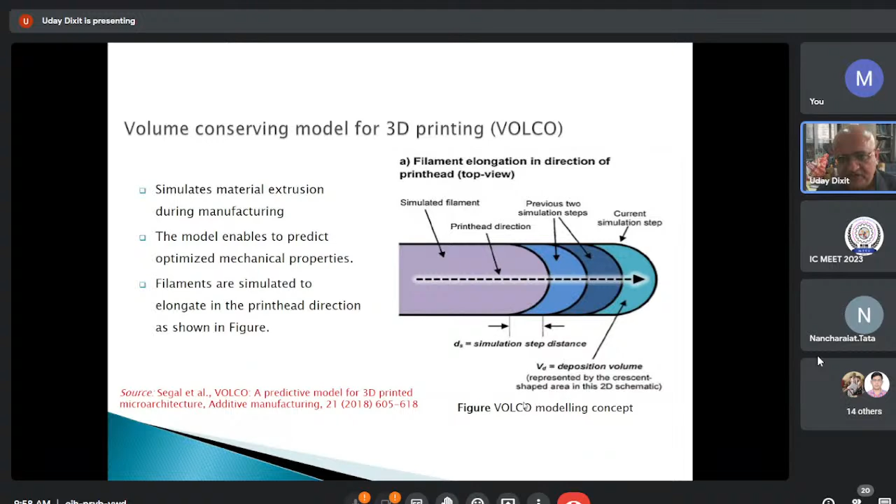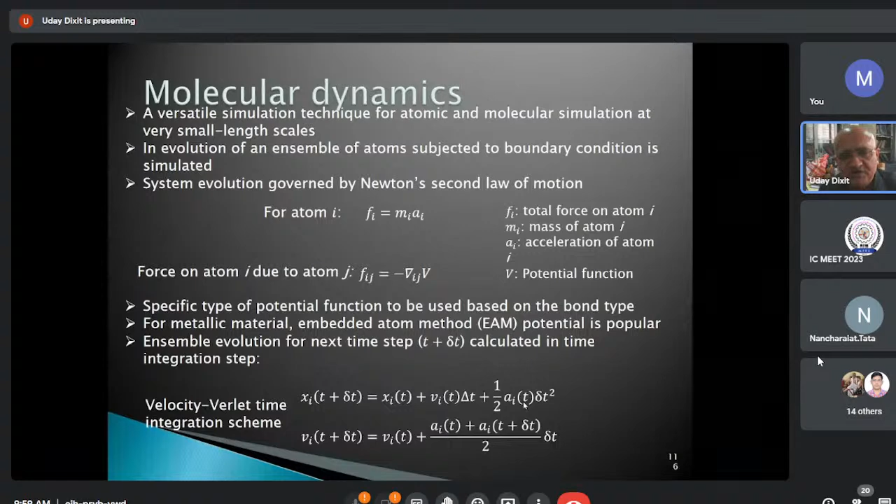Then there is molecular dynamics - one technique where you model each and every particle, following Newton's law with some potential etc. So these are the equations. Another technique is crystal plasticity, where you go to the crystal level and consider it as anisotropic, with some slip directions in which deformation will take place. So once you understand that concept, you develop the crystal plasticity model and write different types of equations.

So we compared some case studies. This work I presented at a conference, in association with one group - basically Lappeenranta University, Dr. Anish Rai and myself. We did molecular dynamic simulation, taking different papers and analyzing how both work.

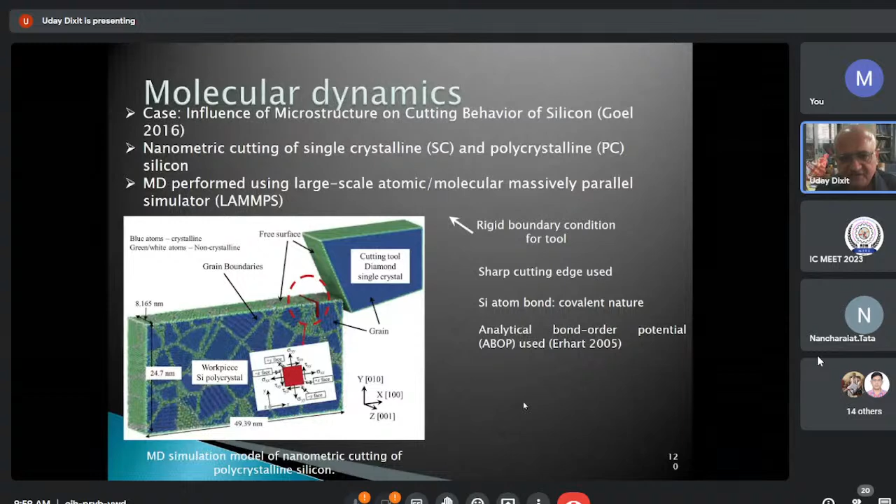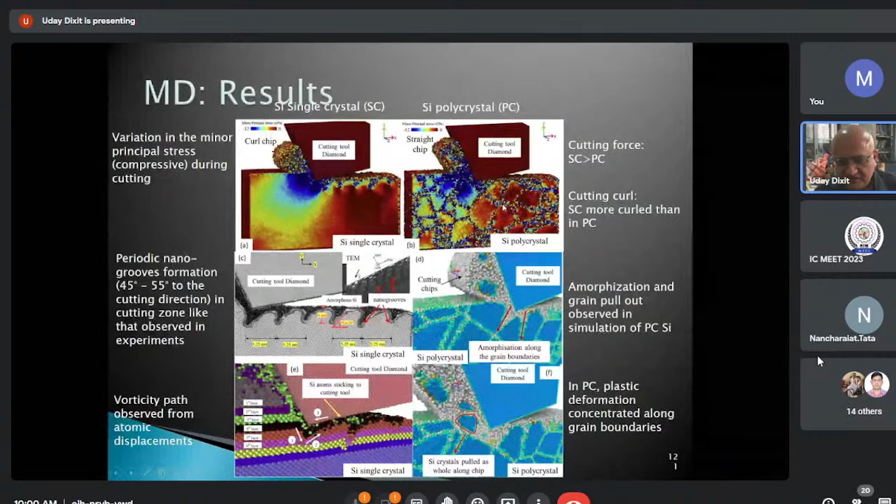Here, suppose single crystal machining is done by a diamond crystal tool. These are molecular dynamics results - this is single crystal, this is polycrystal, and then you get this result. And we do the same thing by crystal plasticity, and we also get results here.

There are two approaches: molecular dynamics and crystal plasticity. Molecular dynamics is useful when the underlying deformation mechanism is not well understood. If you could do molecular dynamics, you can predict each and everything because you are going at the atomic level, be it 3D printing, heat treatment, machining, or metal forming. You don't need to understand anything, you just see how the molecule is behaving. So that way it is basically the panacea for all. It gives fundamental insight of the deformation process and no prior knowledge of the system evolution is required.

But then why are we not shifting to that? Although there are now free codes available on the net, one can do that, but it's very difficult because of the increased complexity of the potential and computational cost. That means if you want to simulate, it may take days or even years. Whatever I am doing by FEM in 10 hours may take 10 months here. Time scale and domain sizes are very limited, and you have to give an unrealistic strain rate, otherwise at a slow strain rate it will take even more time.

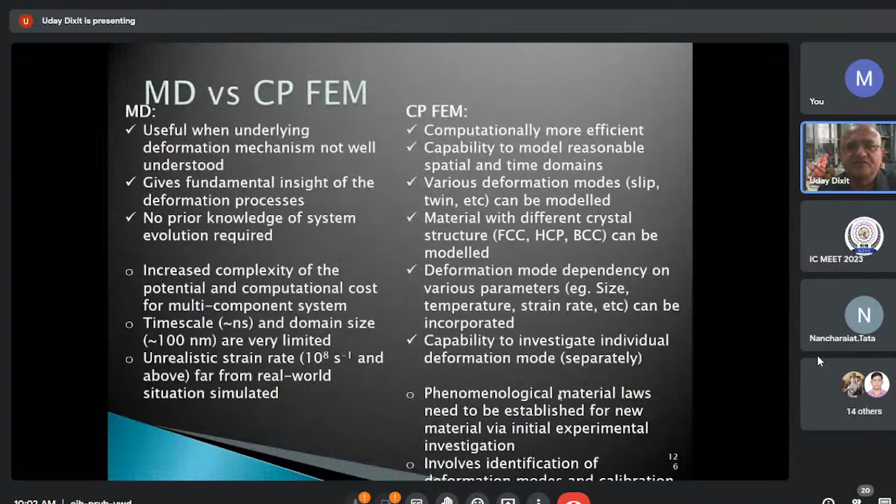Whereas crystal plasticity FEM is computationally more efficient, with the capability to model reasonable spatial and time domains. Various deformation modes can be modeled, materials with different crystal structures can be modeled, deformation mode dependency on various parameters can be incorporated, and there's capability to investigate individual deformation modes. But it basically needs phenomenological material laws, meaning you need a lot of experimental data, etc. Then only can you do it, and it involves identification of deformation modes and these types of things. So compared to molecular dynamics, it is very fast, but you should have enough data from the physics of the process.

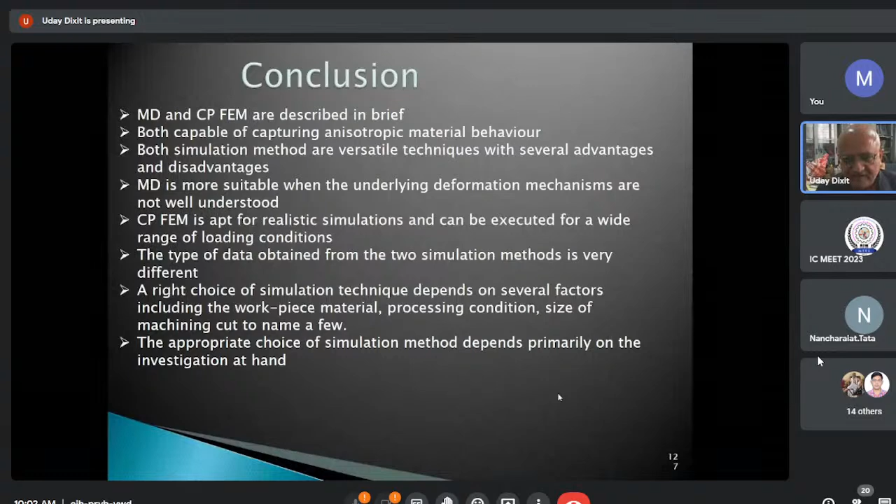So basically these two processes in brief, I end my talk by telling that molecular dynamics and crystal plasticity FEM will become popular in the coming days. Crystal plasticity FEM means it is FEM only, but using the concept of crystal plasticity. I also gave exposure about other processes. So I hope it was useful in terms of giving exposure to you. And I thank you for your kind attention.